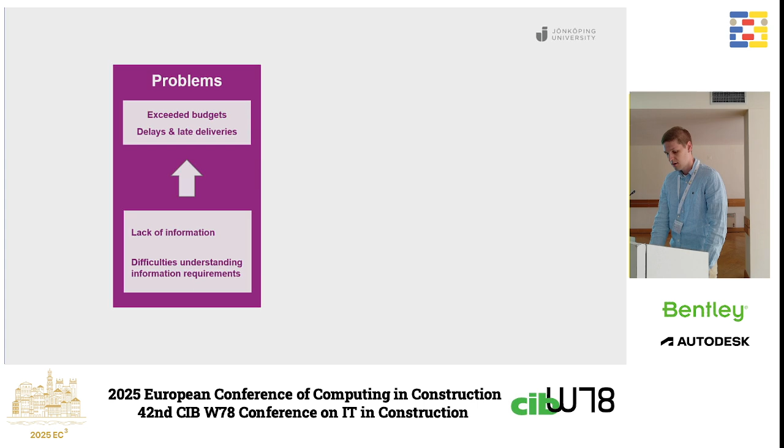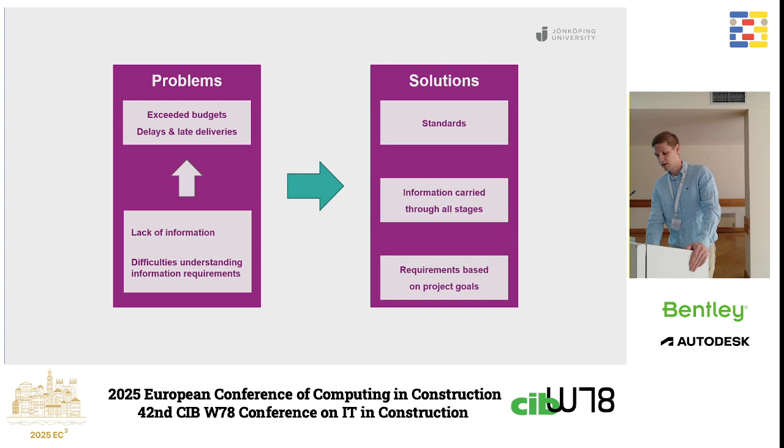And the solution that we then propose is partially use standards to make sure that everyone follows the same sort of guidelines, and that you carry information through all stages in construction, and you make requirements based on the project goals. And to do this, we have four sort of pillars that we have identified: information exchange, production planning, information delivery manuals, and level of information need.

And if we look at the information exchange, these involve topics such as the importance of making sure that requirements ensure compliance, and there is no real universal solution for interoperability, and we also need to align metadata with downstream activities. And then for the production planning, we have information exchanges, and these influence the efficiency and the success of a project, and therefore communication and information sharing needs to be effective in order to achieve a successful project. But for now, there's usually a limited use of BIM tools on site that can sort of facilitate this information exchange.

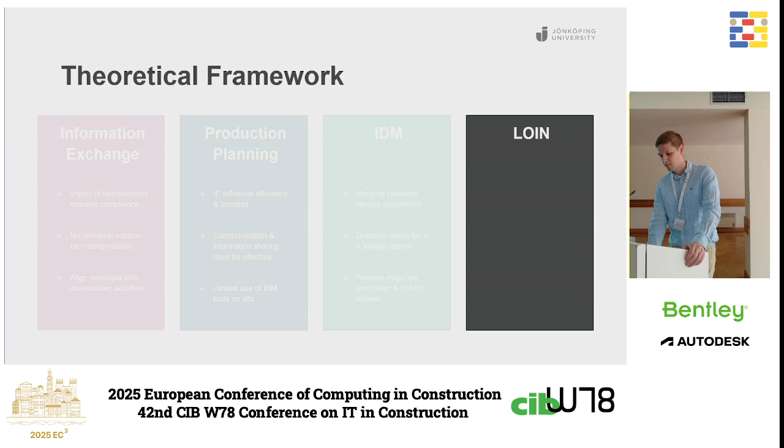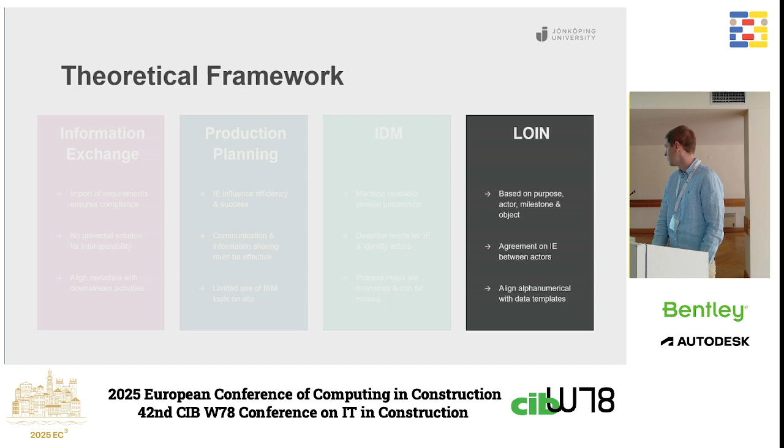For information delivery manuals, they sort of work as a machine-readable format, but these formats are usually not used at the moment, and IDMs are needed to describe the needs for the information exchange and identify actors. And process maps can be used as overviews, and these should also be reused to build on and learn from previous projects. And finally, for level of information need, as was mentioned in the previous presentation, it's based on purpose, actor, milestone, and object, and it is sort of working as an agreement on the information exchange between different actors.

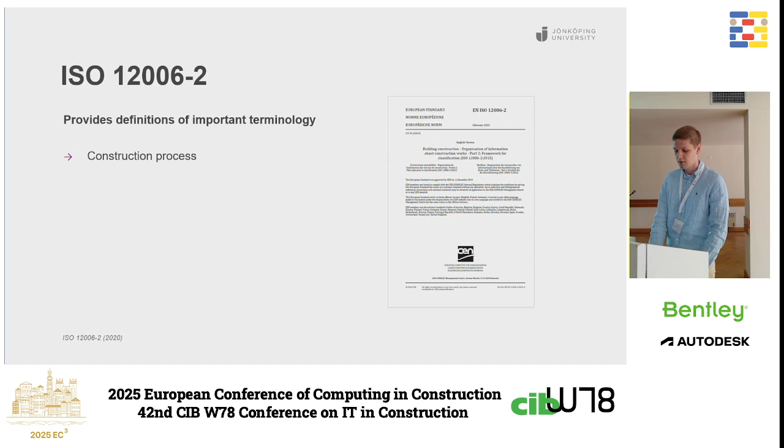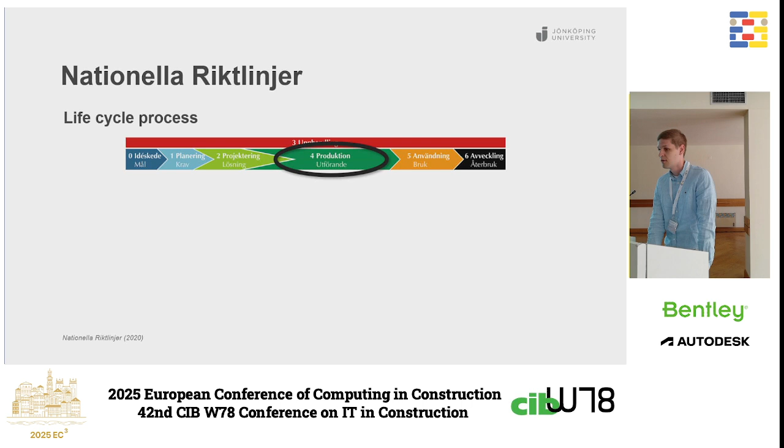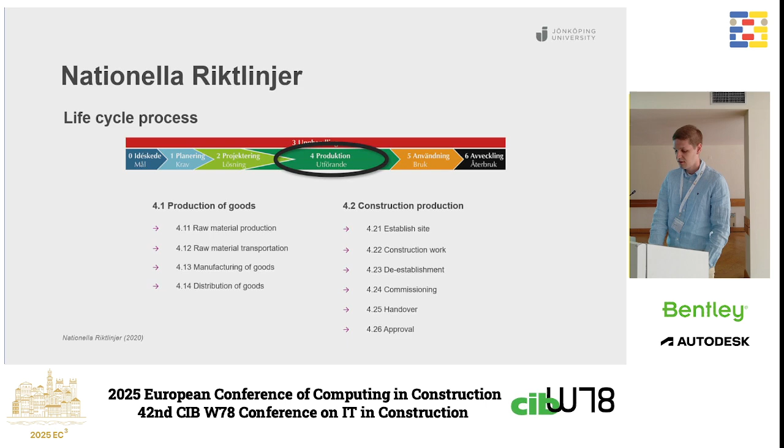And in our work, we started with the ISO 12006-2 definitions for terminologies such as the construction process and construction resources that are part of the processes. In Sweden, we also have another guideline called the life cycle process. And in our project, we have decided to focus on the fourth stage, which is production. And in nationella riktlinjer, this is divided into two subcategories, where you have the production of goods and construction production. So based on this, a contractor gave us a map of their workflow in working with the information exchanges and related topics. And this is also based on a standard called BEAST, which is used in the Nordic countries.

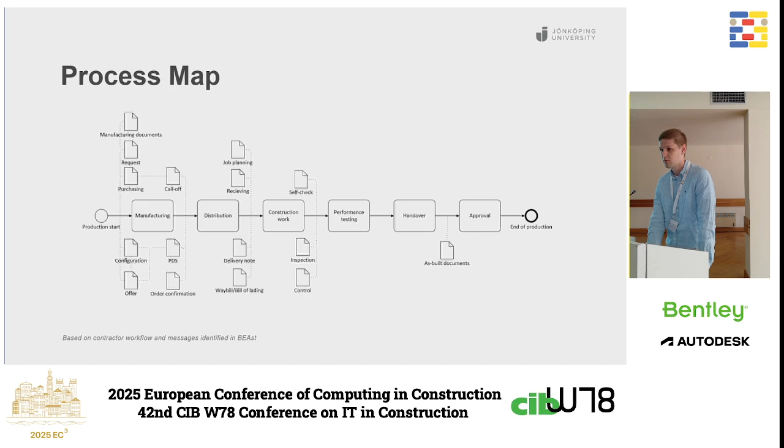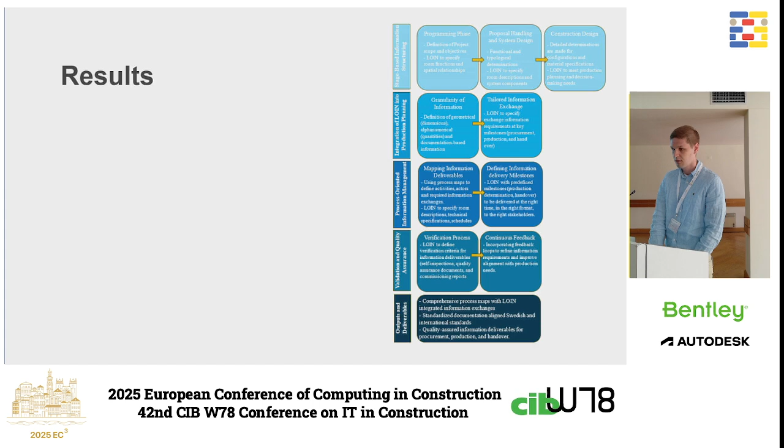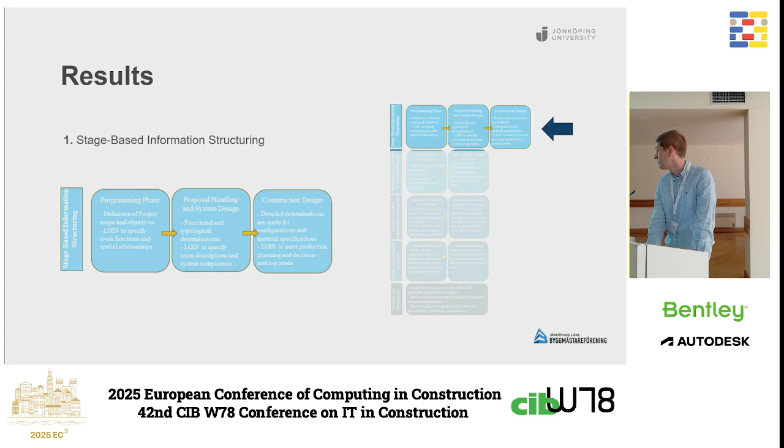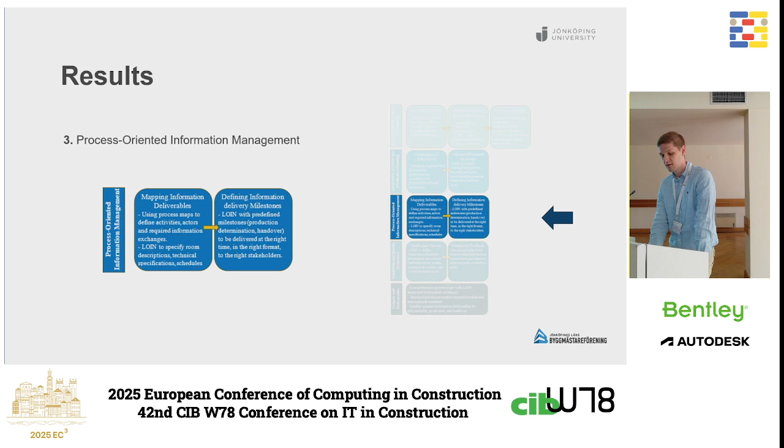So as a result, we produced a quite big, extensive framework. I'm not going to go too much into detail here. So if you're interested in this, I suggest you read the paper. But it's made up of 5 stages, where the first stage is stage-based information structuring. Second stage, integration of level of information need into production planning. Third stage, process-oriented information management. Number 4, validation and quality assurance. And the last stage is then the output and deliverables that come out of the process.

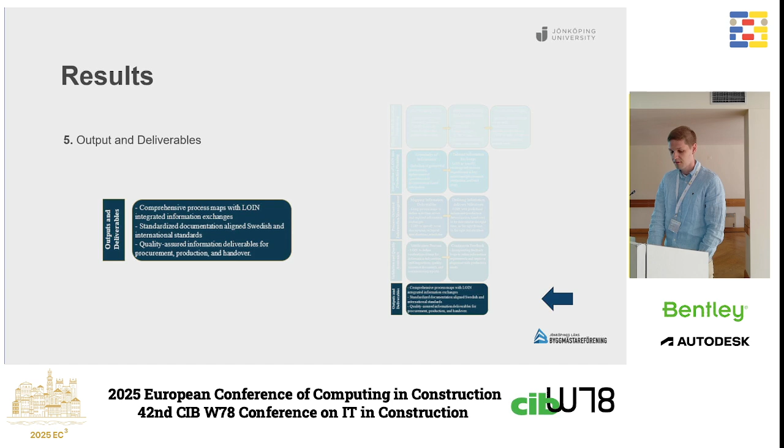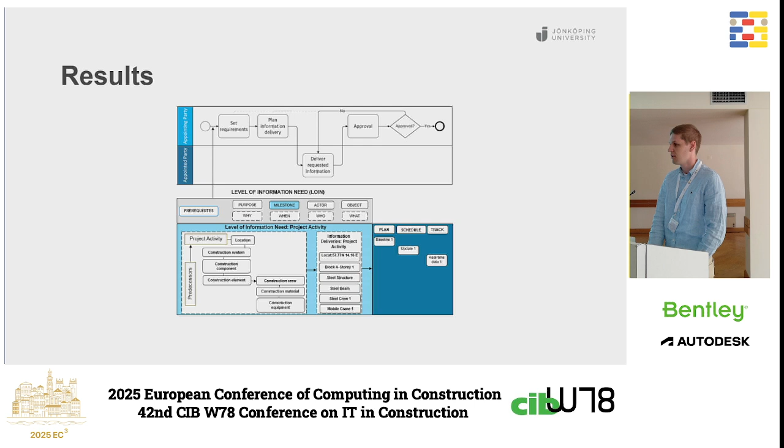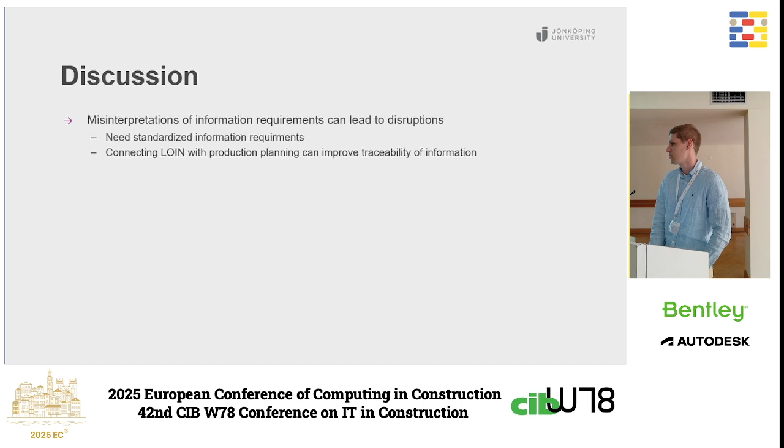So some points of notice here is that misinterpretation of information requirements can lead to disruptions, and that's why we need standardized information requirements. And connecting level of information need with production planning could improve traceability of information, so you can track who is responsible for which information. But in Sweden now, at least, the LOIN adoption is very limited, especially among smaller and medium contractors. And we therefore propose that a standardized library for level of information need templates could be established on a national level, where these smaller companies could go and fetch the relevant template for their respective tasks and activities.

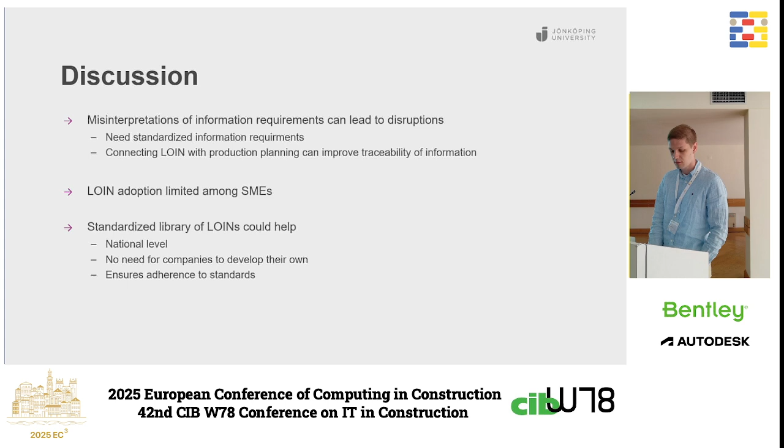So to conclude, we know that standardization can strengthen interoperability between stakeholders because everyone works in a similar manner. And implementing level of information need could lead to improved efficiency. We develop these frameworks with the industry, but for now they're still a work in progress, so this is just an early look at the work, and they are improving almost day by day. So these are not evaluated yet. This will happen probably sometime later this year.

And we also need user-friendly APIs, and we suggest moving towards knowledge graphs and linked data to connect different frameworks, and also to enable the planners and designers in companies that are not always super educated in BIM to keep working in a similar manner as they have done before. And the linked data track for applying these topics looks promising. Like was already mentioned in the previous discussion, there's a LOIN ontology, and I've seen a couple of other works in the last few days that should also be able to be implemented for this.